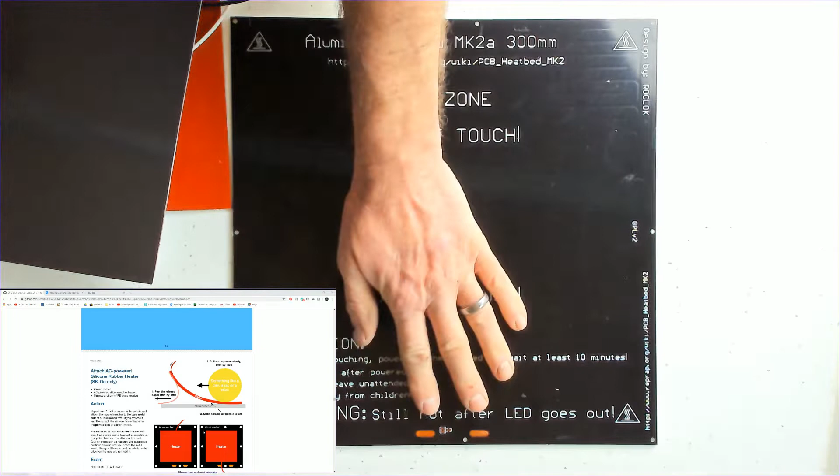Okay, so the first thing that we need to do is have a look at your hot plate. Now as you see in the description, you can have this set up two separate ways. I'm going with the way that the heat bed would sit normally. So as you can see there, that's the terminals where you would wire it in if you were using this in its original state, but then with my heat pad I'm going to put mine on the same way, like that. So it's just as it would be if it was using the original terminals.

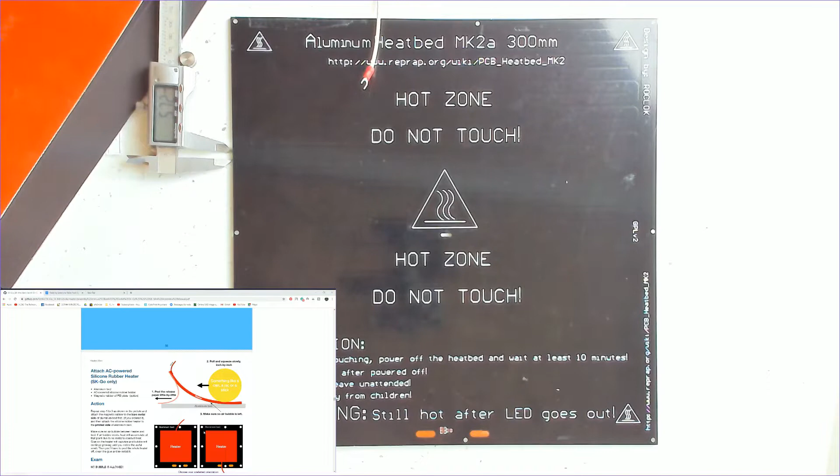Now in my case I also have the adhesive magnetic build plate with the sticker, so I need to turn mine over. Let's see if we can get the camera to focus. And then I have my magnetic backing for my build surface to put on, like so, and then when we come to start printing, my textured magnetic plate will sit on like that.

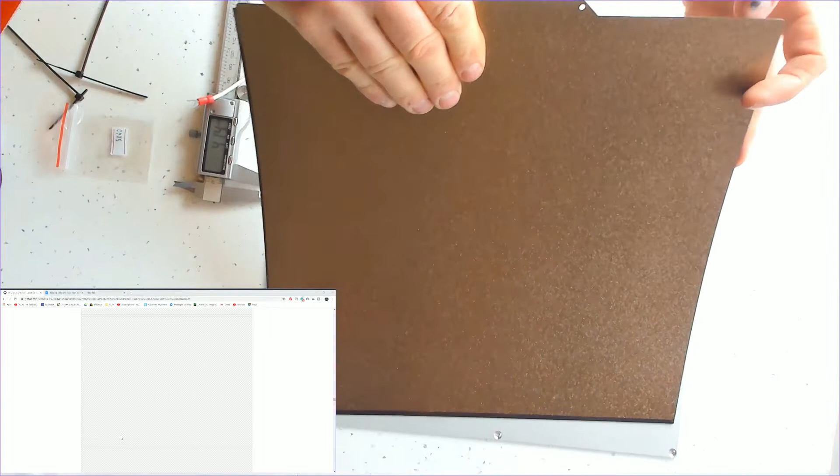Now what I'm going to do is I'm going to fit this first, as it does suggest in the description. So I'm going to line it up roughly to where I think it is sort of fairly square. I mean, if you want to go down the route of using your micrometer and getting it absolutely spot on, by all means do so, knock yourself out, but I'm not that bothered. But what I'm going to do, I'm going to use a Sharpie, or you can use any other felt tip pen or a pencil, and I am going to mark a little line down this side.

Now the reason for that is, I know it's put a nasty mark on my metal surface, but I'm really not that bothered. The reason for that is when you come to stick it down, you're going to peel the surface off the back like that, and then you're going to line it up with that line like so, and then peel the backing off and lay it down. So that just gives me an edge to work to, like that, while I start doing the peeling off. So let me get the corner of that peeled and we'll get that fitted on.

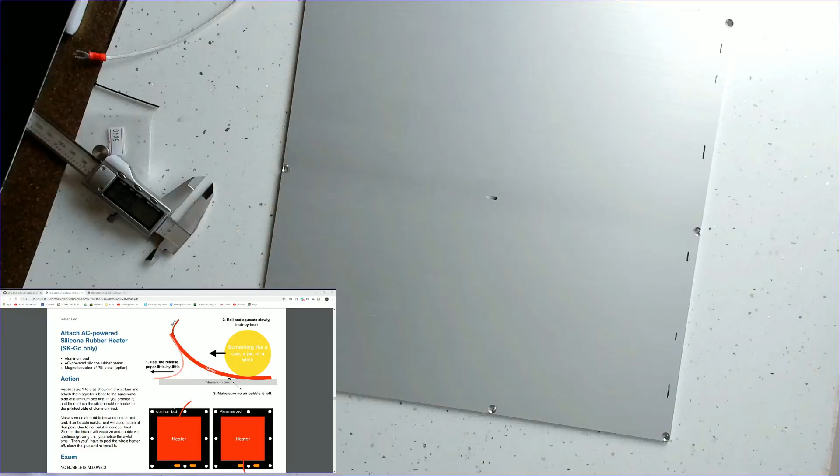Now at this stage you want to make sure that your aluminium plate is clean. A little bit of 99.9% IPA or 100% IPA on a little cloth, give it a wipe over, make sure you get any grease off it that may have been on your fingers from when you were oiling your lead screws or your linear rails. So yeah, just make sure that this build surface is free of oil or dust or grease or nasty stuff, no lumps in it, no bits of grit on it, anything like that, before you go any further.

And then you just need to take your backing, you need to just bring it over a little bit like that. We're going to set it onto my line like so, and then I'm going to do that, and this is where the roller comes in useful. You don't actually need to roll it, you just do that with it over the surface of the bed as you bring it forward.

That way you're making sure you're getting no air bubbles in. As you slowly pull the backing paper away and you're sticking it down, that makes sure you get a good solid fit of the magnetic plate as you bring it forward. No air bubbles, very important, no air bubbles.

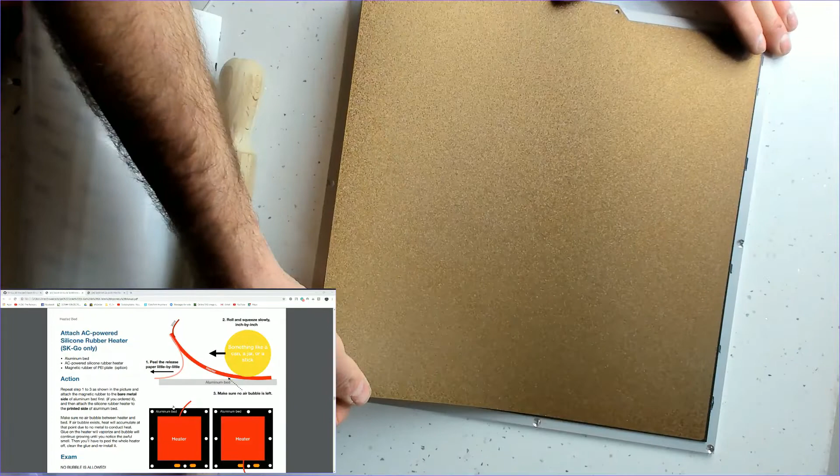But that is your magnetic plate fitted beautifully to the top of your build surface, and then when you come to do your printing, that sits on like that, but square-ish, like so. So that's fantastic. And now what we'll do is we'll flip it over and we'll do exactly the same with the heat pad, exactly the same system, just to make sure we get it on nice and neat and sorted.

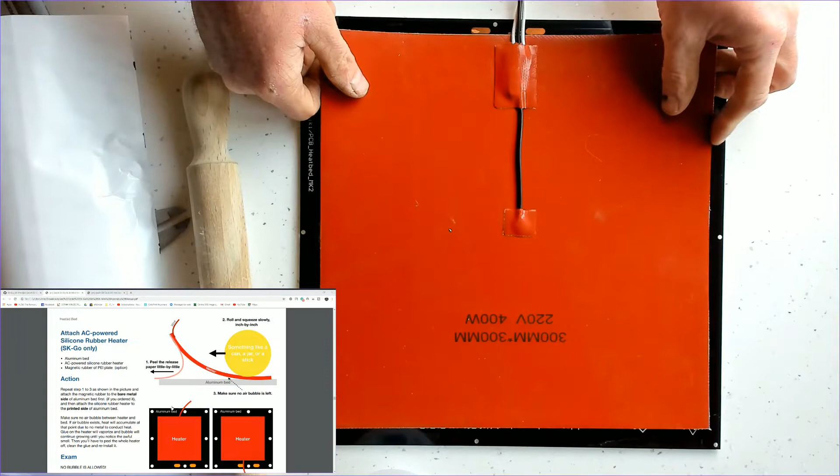So now with your build plate flipped over, we're going to take the heat pad. We're going to do the same thing exactly with the heat pad. The only difference here is, of course, using a black marker pen on a black surface isn't going to be much use to you. But what I have noticed is, if I can get the camera to focus, if you look at the top 2 points of this triangle and the bottom 2 lines of this triangle,

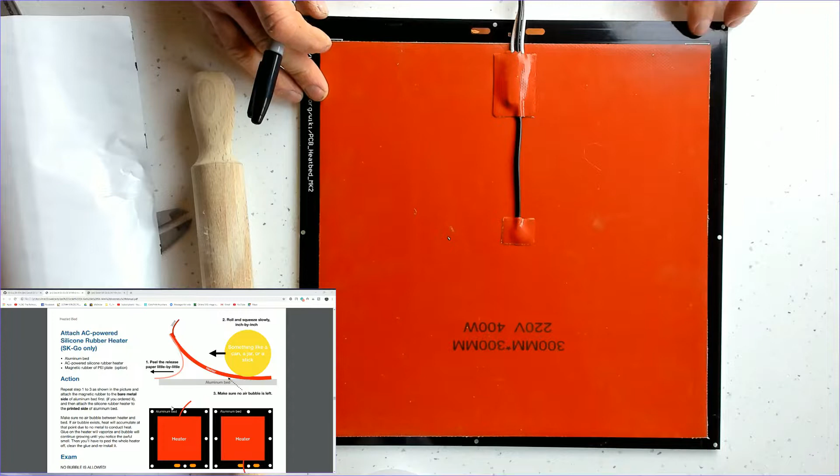when you get the heat mat something like in place, you will see, or maybe you won't because I don't know whether you can notice, but if I just lift that up, you'll see those 2 lines there at the bottom of the triangle. If you pull those flush like that and then look at this end, you've got your 2 top points. So that's your top line and that's your bottom line, so you can set it up fairly well from there.

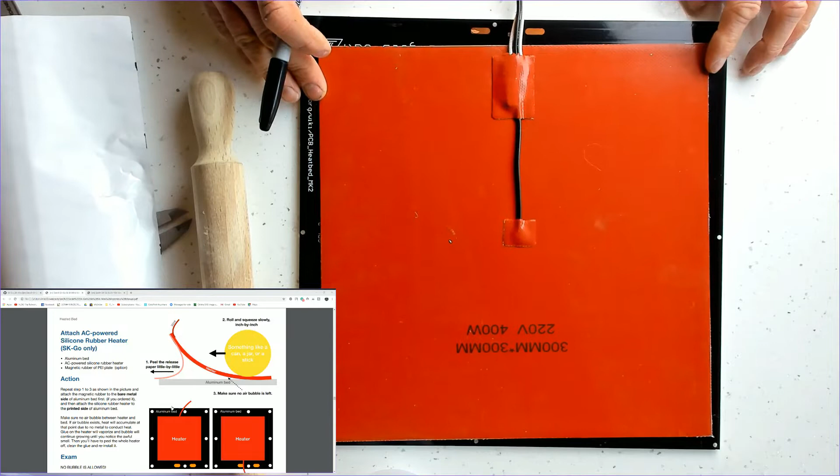You'll also notice that the bottom corners of the triangle there line up with the bottom corner of the heat mat. So if you set it up like that, you can see it is slightly high to one end. It just depends how determined you are to get it absolutely dead center. I'm just using that as a guide in this case, and then it's the same process again. We roll the mat out, making sure we keep any bubbles out.

Please notice you have cables running into here and into here. One of these is your thermistor, which is this black one here. Please make sure you don't crush your thermistor by putting too much pressure on it. Work round it when you get to it. Maybe use your fingers or lightly with the roller just to make sure the mat's down, but don't go braying at it with anything. If you crush your thermistor, you've got problems. So let's get that on.

So carefully line it up. Get your top edge stuck. Make sure you're happy with it, your positioning before you go any further, because once you're done, you're done. At this stage, if you want to just lay it flat like that and make sure you're level all the way around, I'm actually

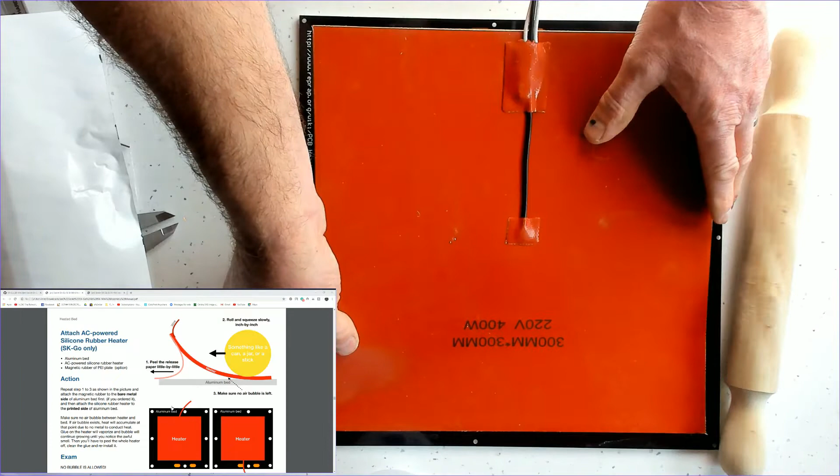slightly off to one side there, so I'm just going to attempt to lift this corner slightly. As you can see, once it starts to stick, you're going to struggle to get it right. So there we go again, making sure I'm as near as darn it square and level. I'm fairly pleased with that. So let's get that top edge on, then lift underneath, get hold of the backing, pull the backing towards you.

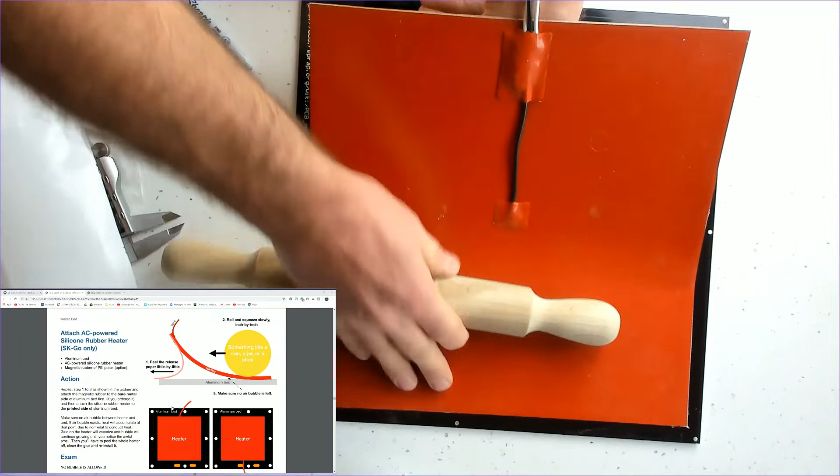At the same time, I'm actually rolling this time, channeling my mother, making pastry. Again, to make sure no air bubbles, no dirt underneath. Be careful around your thermistor. Pull the sheet out a bit more. Put the rolling pin back. Pull the backing sheet a little more.

Again, no need to rush. If you rush, that's where you make mistakes. That's where you'll get your air bubbles and you'll have trouble. You can see how tight I'm getting it to the backing paper by the force I'm having to use to pull the backing paper off. That's making sure that everything is absolutely right.

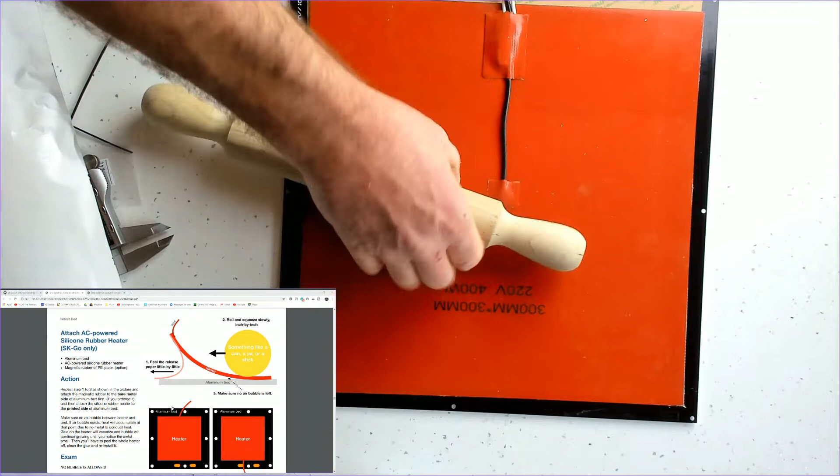As you can see, I'm rolling either side of this wire rather than rolling over the top of it. That in theory will bring it down. You can see I'm about here now with the pull. Pull it a little bit more. Get that roller working. Make sure you keep all the air bubbles out as nice and as smooth as you can.

Coming up to the connections now for the heater. Again, don't apply too much pressure over the top of that. You'd hate to do that any damage after getting this far. Pull forward a bit more. Roller again. And then final bit. Probably better to do smaller sections as you get towards the end so you don't get a large bit suddenly going blop and coming off.

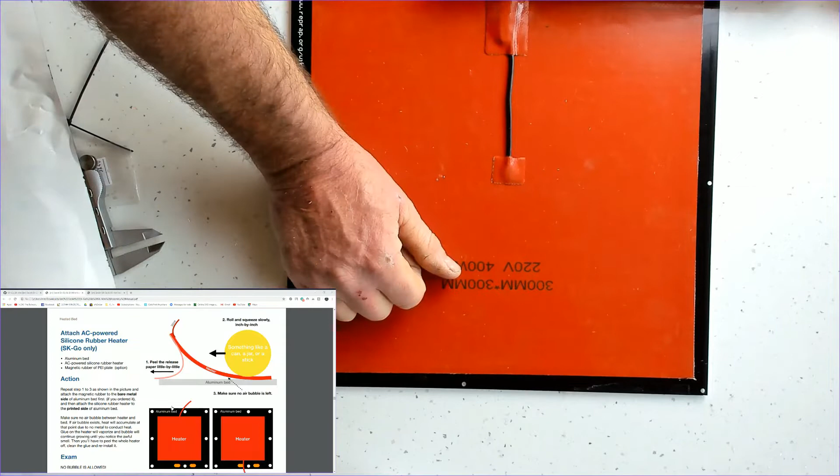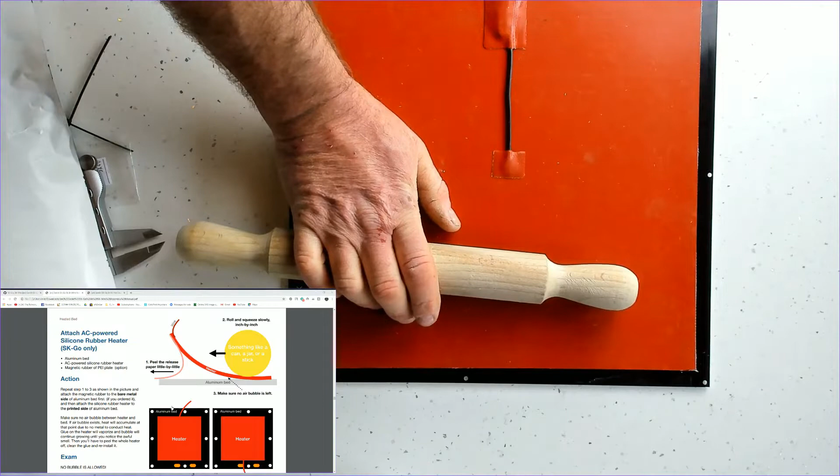So we'll go right to there like that. Roller that. Like so. Final bit. And off it comes. Roll that flat. Roll that flat. Make sure that's all down like so. Check all your edges. Like that. And there you go.

One heat pad. Well put on. No air bubbles, no lifting, no nothing. Magnetic plate on the other side. No lifting, no air bubbles, no nothing. Done. Let's get on to the next stage. So now we move on to the next stage.

Because you built this some time ago, it's always worth checking now that you haven't knocked any of these out of alignment and you haven't got any twist on the frame. Because you've only got these brackets in the corners, it is possible that they can twist slightly while you've set it to one side. So just go around and double check it is still flat and level. If it's not, just loosen off the necessary bolts, push it flat and tighten them back up again.

So the next thing we need to notice is the fact that we have these offset holes here and here, and then these ones here. So in my case, you've got the two front ones, which are going to be the two front bed leveling screws, and then you've got this one here, which is my rear bed leveling screw. And like I say, it is just slightly offset to this side, so just need to make sure that that's how you've got it.

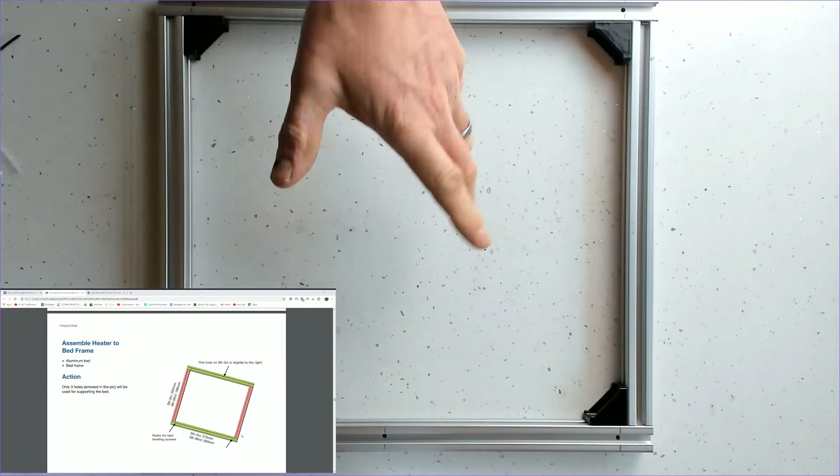If you wanted the orientation the same as it is on the diagram, it would be the other way around, but I'm using my overhead camera for this, so it's inverted it. So yeah, just make sure that you're picking the screw that's offset to the right hand side as your back one, and then you've two front ones there.

I have noticed on the forums that some people have changed it and they've put 4 on and drilled it for that, or 6 or 8. Now we may do that in the future, but at this stage we're sticking to what the manual says and we're going with the standard build. All the upgrades and updates will be done in future videos

if I don't die of coronavirus in the meantime.

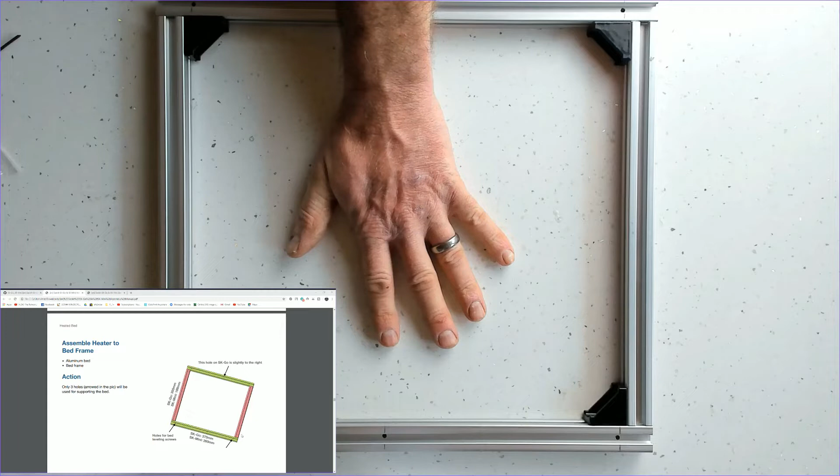So this is the little parts bag containing everything you need for the bed levelling. You've got the M3x45 countersunk bolts in there, the M3 nuts, I don't know whether the washers are in there. The washers aren't in there. The washers will be in the pack. We'll dig those out in a moment. The butterfly nuts and the springs are in there though, so we'll just dig out the necessary washers and we'll get this built together.

So very simply, as you can see in the photograph here and the diagram here, we're going to put the bolts through the aluminium bed, tighten the M3 nut up against it, and then you have the M4 washer, then the spring on, then that sits through the aluminium extrusion there, and then you put your other M4 washer underneath, and then your butterfly nut or wing nut goes onto there. So we'll do the front two corners first.

So we've got bolt in like that, nut on the bottom. Very fiddly when you've got fat hands like me to get that nut on square, but once it's on square you just spin that up. Now you can make this as tight as you like, because this is a permanent fixing like this.

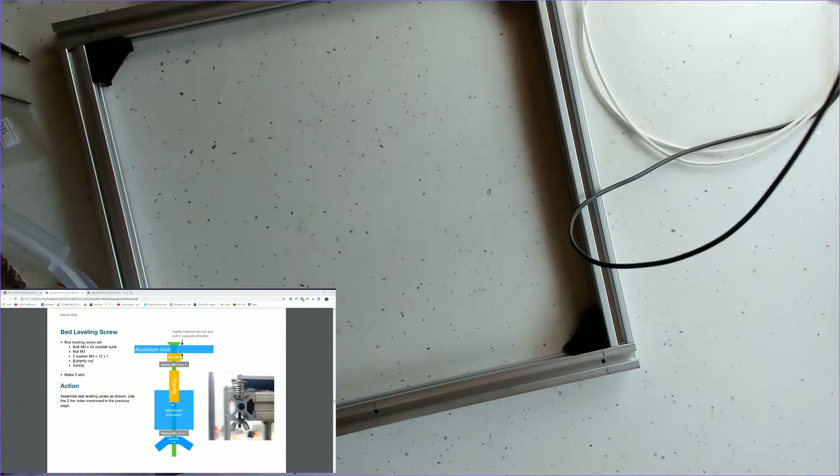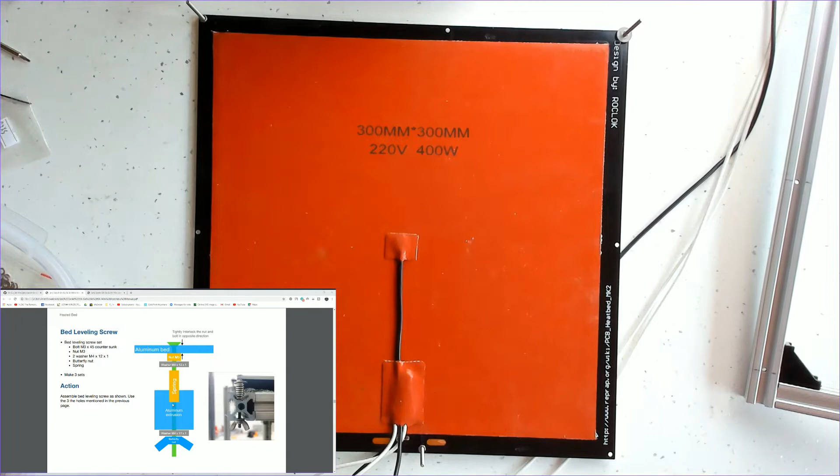Top tip for fitting the next section: lay that down that way, we'll put the washers on, we'll put the springs on, and then we'll actually lower this onto there and put the washer and the springs on from this side, because it's a whole load easier. So your washers in each corner, 1, 2, 3, then your springs on, 1, 2, 3.

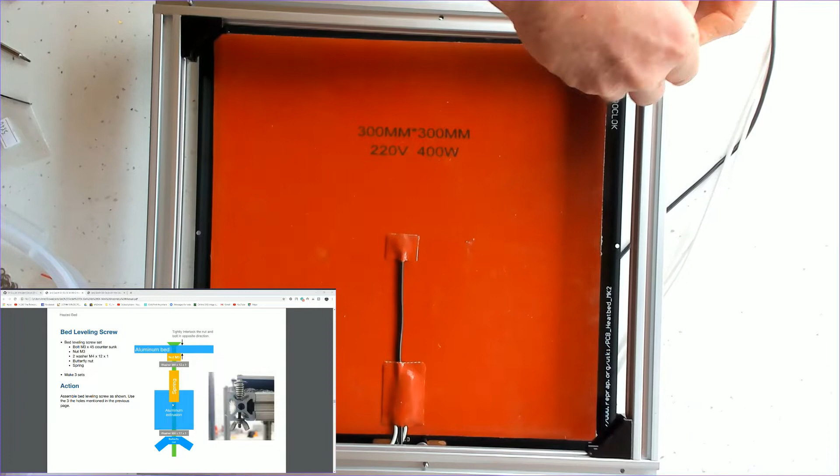Get your surface, make sure everything is the right way around. Those bolts should just drop through, a little bit of wiggling to get them lined up like that, so you've got all those three on, and then your other three M4 washers, and you just need to put it under a little bit of tension to get your wing nut on like that, and then the same on this one.

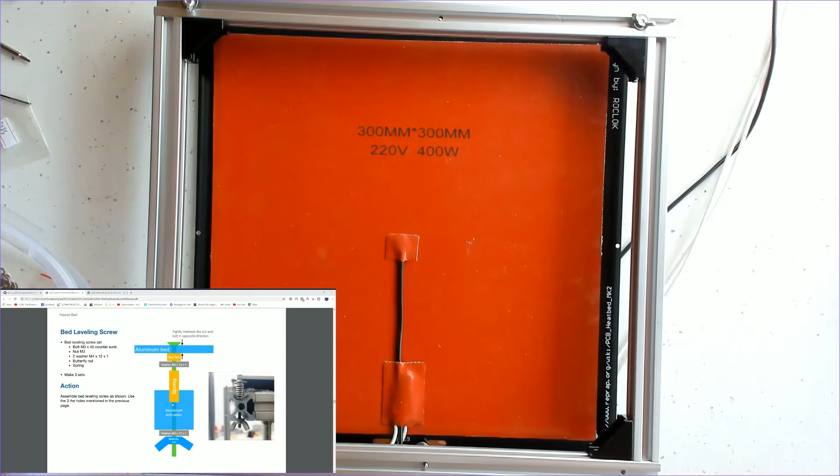Like that, and then the same finally on the single one, which will be your back one, with the orientation that I'm using and the setup that I'm using. That goes on like that.

Now if you tighten them all down just so they're flush with the top of the wing nuts, you then know that you've got equal tension on all three leveling points, therefore you're not twisting anything, you're not twisting the build plate or your frame, it's all under equal tension because you've got your wing nuts all tightened the same amount, and we'll put that to one side and we'll carry on.

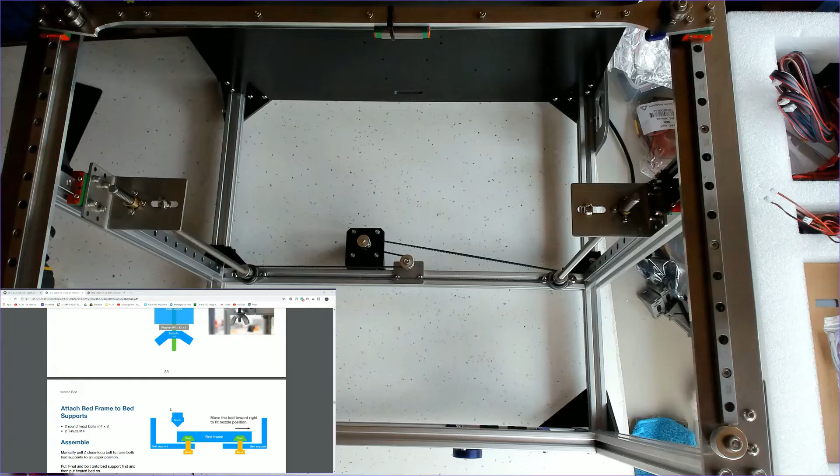So we simply put your M4x8 bolts through the plates with your T-nuts on, making sure your T-nuts are running the right direction to accept the extrusions from your build surface. Feed your cables through and out of the way, like so. And you just need to sit those onto your T-nuts. Slide your build plate back.

We will set this up squarely later on, but you need to make sure that the front of your build plate here does not come beyond the front of your frame here. You also will need, at some point, to slide the whole frame this direction so that your start point for your nozzle is in the right place, but that can all be adjusted later. For now, all we're going to do is get it so the T-nuts grip the build plate and it doesn't fall off. So now you've got it like that.

Trusty wobble stick underneath again. Tighten those up. And that's your bed frame in place for now.

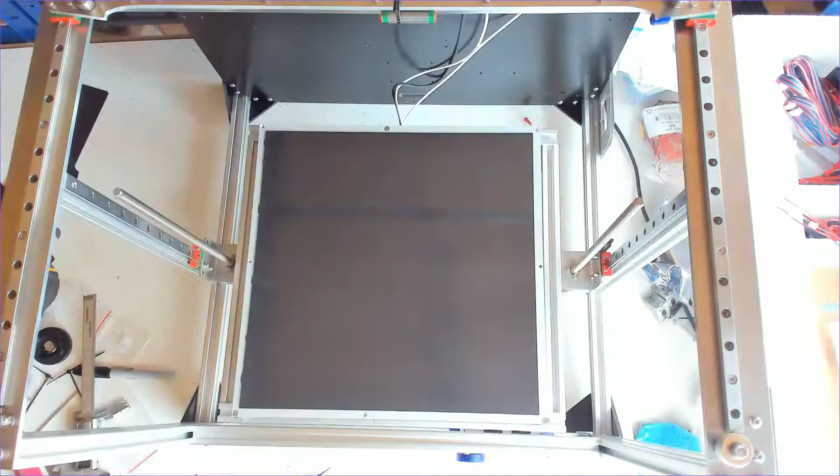Just a little addendum at this point. If you want to make sure at this stage that you have got your build surface perpendicular to your frame, if you lower your lead screws down until you've got your frame there level with your frame here, and you've got your gap all the way along, you can then measure that with your calipers or a tape measure, or you could even use your plastic guide.

If you actually do that, you can check and see that you've got the same distance all the way across the front. That then tells you that your bed is square to the front of your frame, which means that everything should be good for later on.

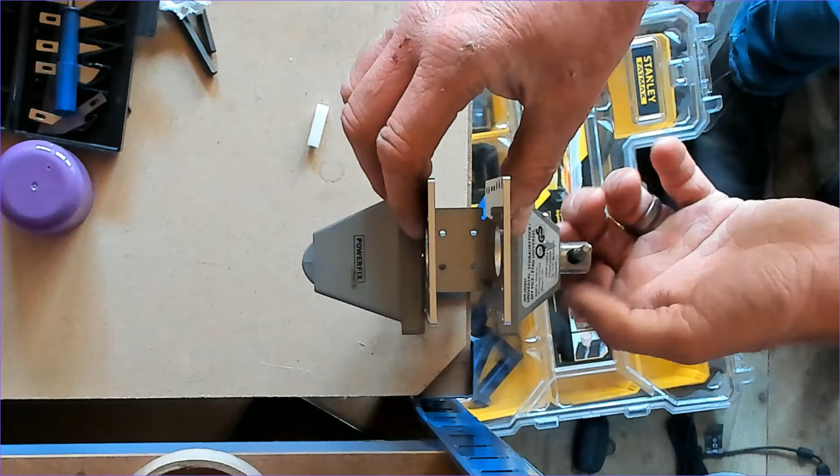And basically all I've done is I've put the centre section and the two side sections into the vise and just carefully nipped it up just so it started gripping, making sure I still have enough flex in it to open it up like that to feed the stepper motor in. We'll go and put this back on the frame, put the bolts back in, drop the stepper motor in, and then slowly tighten up the four corners with the bolts and the inserts, and hopefully that will nip it up without causing too many issues.

Another little addendum: if you find that you can't get your nut on the back of your M3 bolt, if you have some longer M3 bolts, which I just happen to have lying about, put those on, use those to pull your edges in. I could just about get the nut on, but I was a little bit concerned about stripping it. So like I say, I've put these longer M3 bolts in I had in my spares department, which means I can nip those up now to such a point that the original bolts will fit through, and I'll have plenty of thread on the back to get the nut on.

So now we move on to the belts. As you can see, we are provided with a 6mm GT2 belt. This is approximately 2 meters in length. Now what I suggest you do is you test fit your belt around all the pulleys. Don't get it too tight, but do it all when you've got the belt in one piece. Mark the belt where it will feed through the plate here, and you would snip it, and then check that you have enough left on the rest of the belt to do this section here.

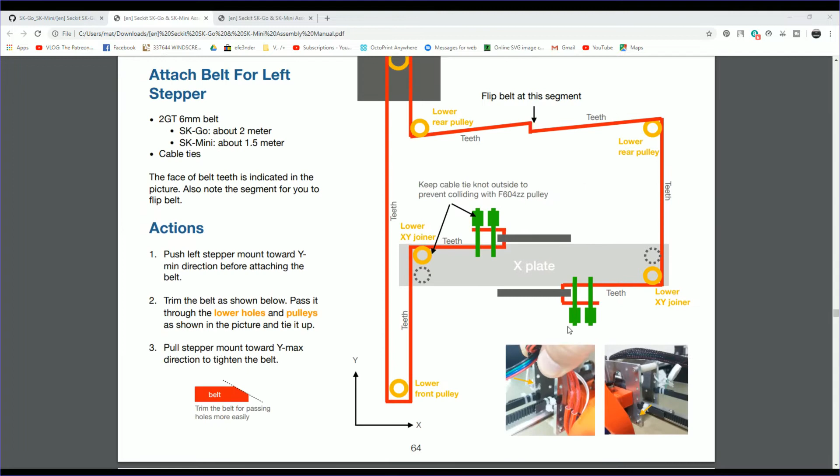Because what you don't want to do is to do this, cut it, and then find you haven't got enough left to do that, or cut it in half and find that you've got enough to do that one but not enough to do this one. So that's the first thing I suggest you do. I've done that, I've checked it, and I've made sure that I can cut the belt right down the middle, and it'll give me two belts of a perfect length to run around the system.

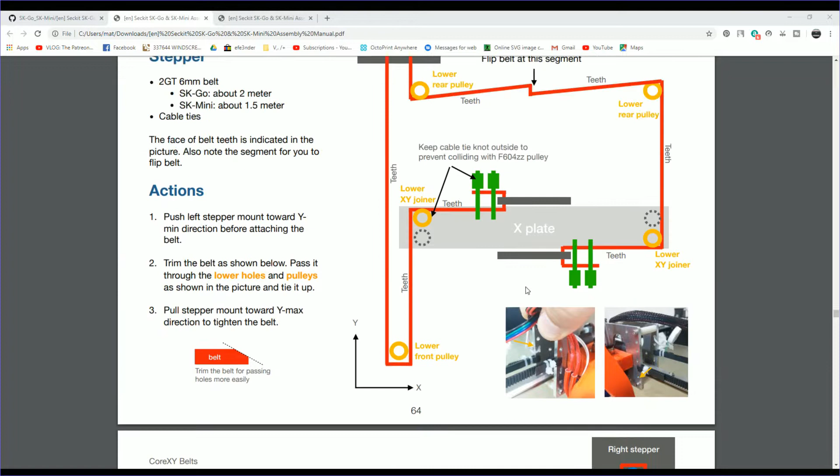Also note, they suggest trimming the belt at a slight angle at the top, just so it feeds through the slotted parts of the plate easier. I find that if you push it through and then get a pair of pliers on the back and just give it a little pull, it pulls it through a lot easier than trying to do it with your finger ends. So let's get back to the machine and I'll actually show the fitting of those belts.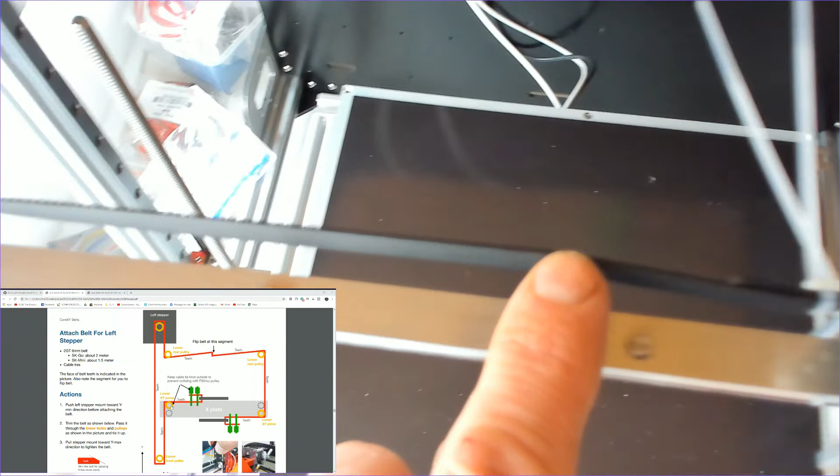So if we follow the path of this lower belt, you see it starts here, tooth to tooth, 2 cable ties on. I'll snip those off in a minute and maybe shorten that a little. We come along the belt here, it goes around the back side of that pulley, comes around the front, goes along the front of that toothed pulley, runs down around the tooth pulley on the stepper motor, making sure the stepper motor is loose, so the stepper motor is all the way forward, so when you come to tension it you can push back on the stepper motor, thus tensioning the belt. So it comes round, comes across here.

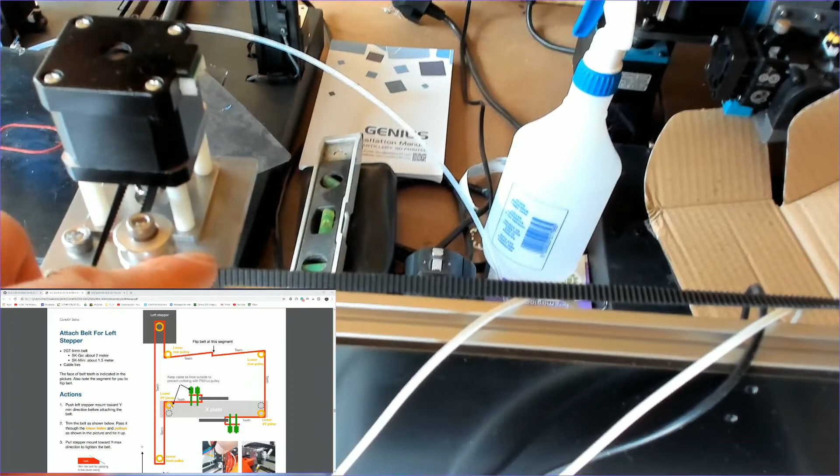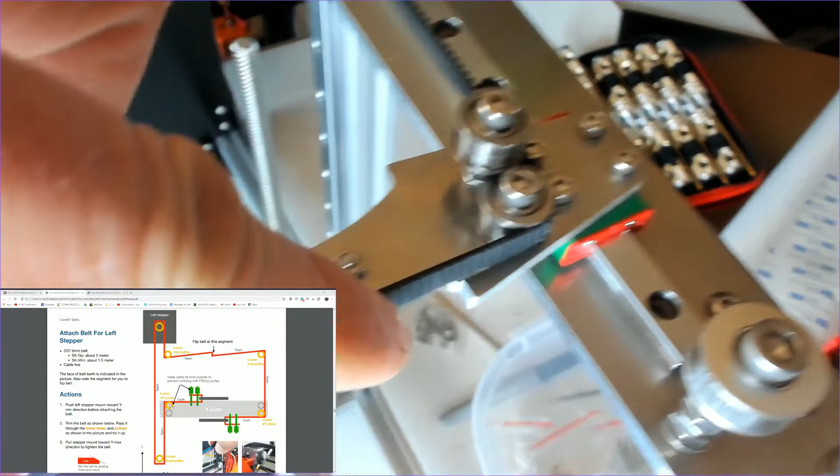Now across here we have a twist in the belt. As you can see, the teeth are facing here and then they turn over in the middle, so there's your twist, and then it goes around the bottom pulley there, so the teeth are now on the outside of the belt. As it comes down here, round to this pulley, and then we go along and through the lower slot in the front there, we've got tooth to tooth again, so we'll put 2 cable ties onto there and then snip the end of that one off, and that's the lower belt on.

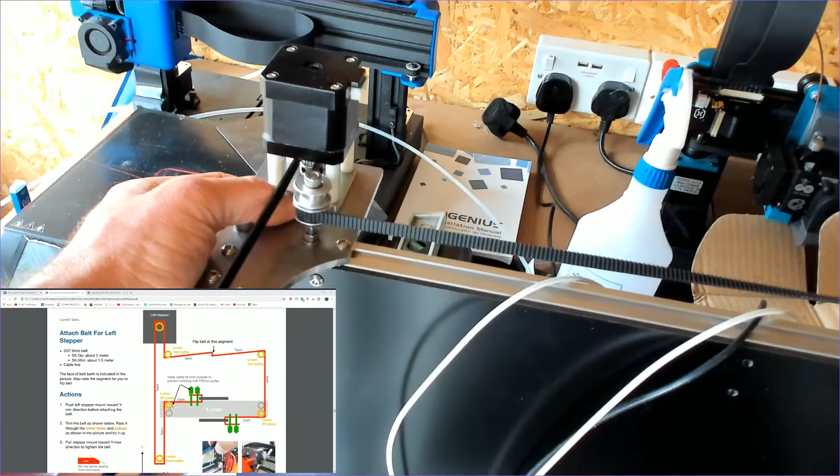I've got a fair amount of tension on it at the moment, but like I say, we will be tightening that by pushing the stepper motor back, which will then put the whole lot under tension, but we'll cover that in a moment. Let's get this snipped up and shortened, and then we'll go do the higher one. We'll come back, look at that, and then we'll move on.

So now we'll check the path of the upper belt against the diagram. So teeth facing, clips on, go around this top pulley, down along here, around that pulley, a twist in here, so the teeth go from the outside to the inside here, then they go around that pulley, round that stepper motor, come down here with the teeth on the inside still,

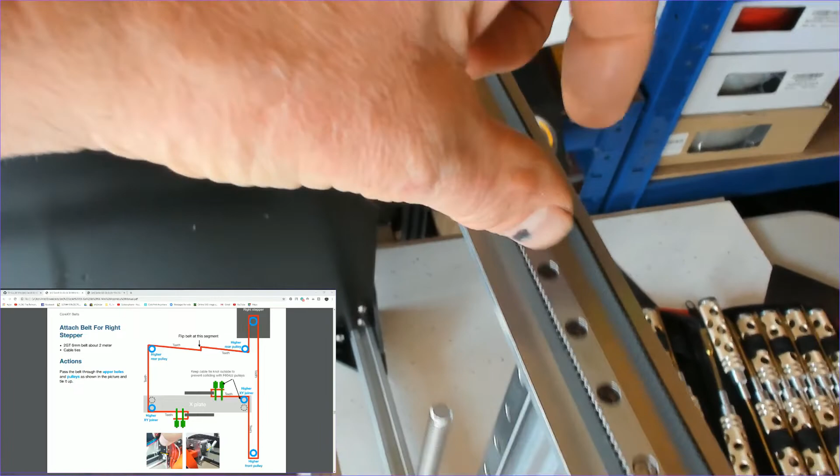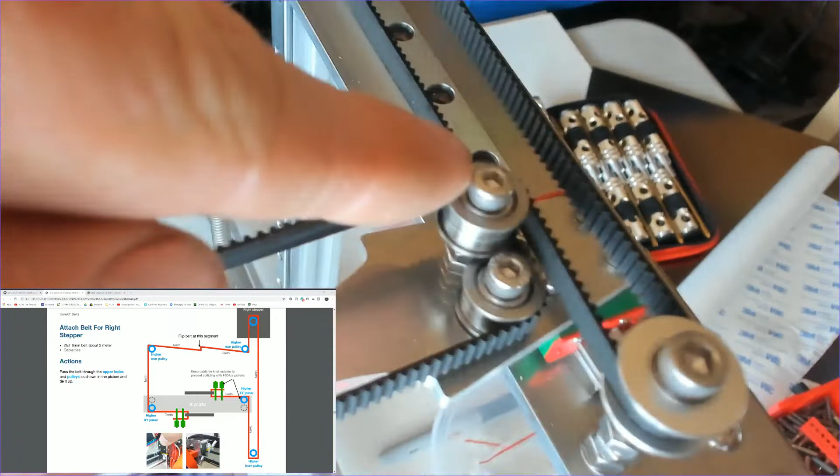along here, around this pulley at the end. That's a toothed pulley, so make sure your teeth are on the inside to go around that. Then round this pulley here, back, terminates on the top slot at this side here, two cable ties on, and then we'll just nip that back there, and that's that section done.

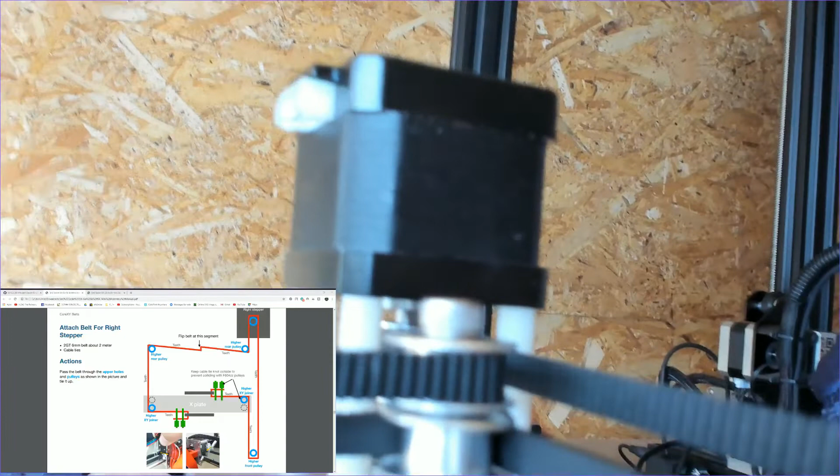What we need to do when we've done that, we'll come back and we'll check the height of the two pulleys on these rear stepper motors to make sure that they're sitting right and that we have no binding issues with the height of those pulleys in relation to everything else. So pulling this right hand pulley, which is this one here, backwards and forwards, you can see that it's riding a little bit high. You can see the belt going up and down, which means it's a little bit high on the stepper motor behind here. Get you a shot.

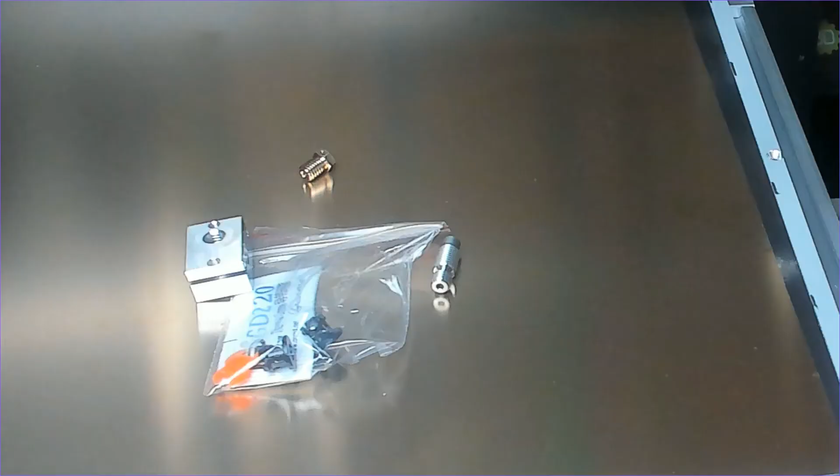So I need to get the Allen key, drop that cog a little, which will drop that belt on that pulley a little, which will make it run smoother. In the instruction manual, it basically says go and find a different resource on how to build your direct drive hot end. Well, let's help you out with that. Let's get this one put together before we fit it to the machine. So let's start by building this E3D V6 style hot end. Simple enough to do. It must be, because I can do it.

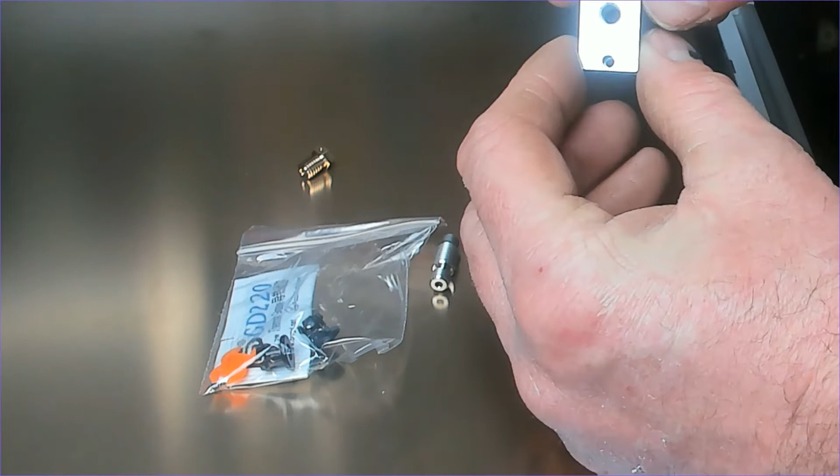First, get the orientation of your heater block the correct way around. So you want it so you've got the screw thread that the nozzle goes in, tapped hole above, tapped hole below, but you've got the one nearest like so. Get your nozzle, turn it just a little way in to start with, like that, not all the way. Then what we want to do is screw it all the way in, like that, and then unscrew it about a quarter turn.

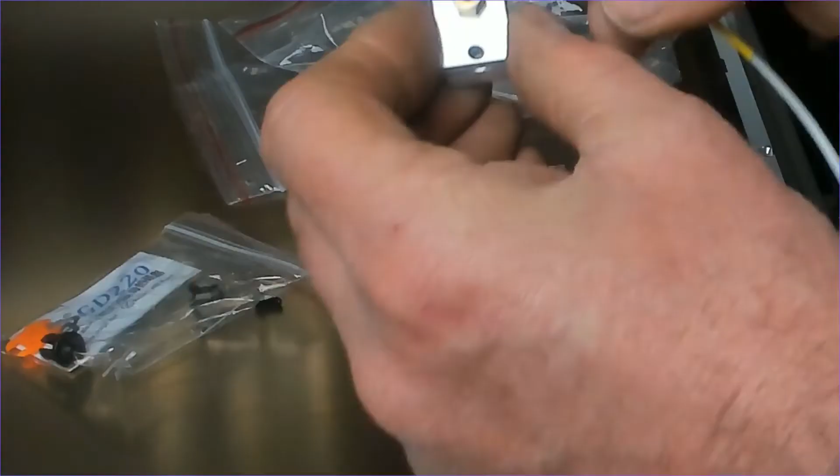Then get your heat break, screw that in until it bites on the nozzle, like that. We've got that piece like that. Insert the thermistor so it's just flush with that edge. Turn the grub screw until it just touches the thermistor, like so. And then turn it 1/8 of a turn. So you want to do it about that much, no more. You do not want to crush the thermistor, as that will cause you more trouble than it's worth.

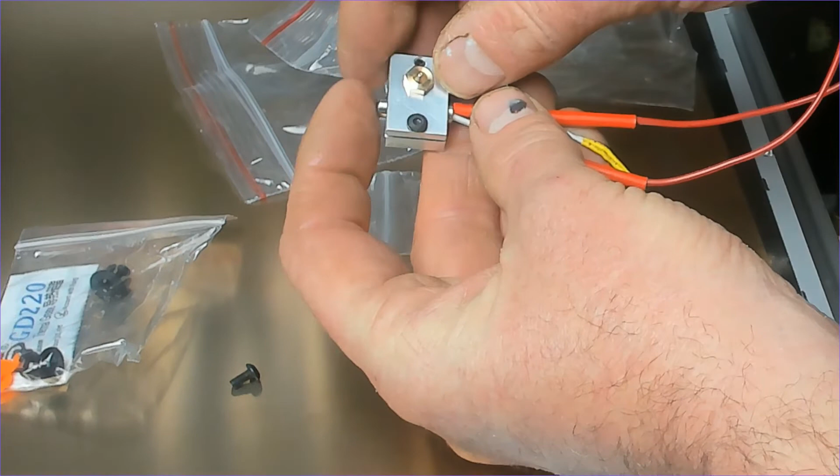Take the bolt for your heat cartridge, pop that in, screw it up. Just do that by hand. Insert your heat cartridge. And you just want that set sort of equidistant either side, and then give that a little nip up. Again, do not over tighten it. You do not want to crush it, as that will cause you problems later on.

You just want to tighten it until it slightly deforms that metal there, so as you can see it's just pushed in slightly, so the gap's narrower at this end than it is at that. No more than that, just slight deformation, so it just bends over slightly, and that's more than sufficient to hold your heater cartridge in place.

Then grab your thermal grease and you just want to apply a little to the thread of the heat break. You don't need to use it all, just apply a little around the thread. Like so. You don't need to put it anywhere else but on the thread like that. And then you can screw that in. Like so. It doesn't need to be any more than finger tight. Just wind it in. There we are at finger tightness.

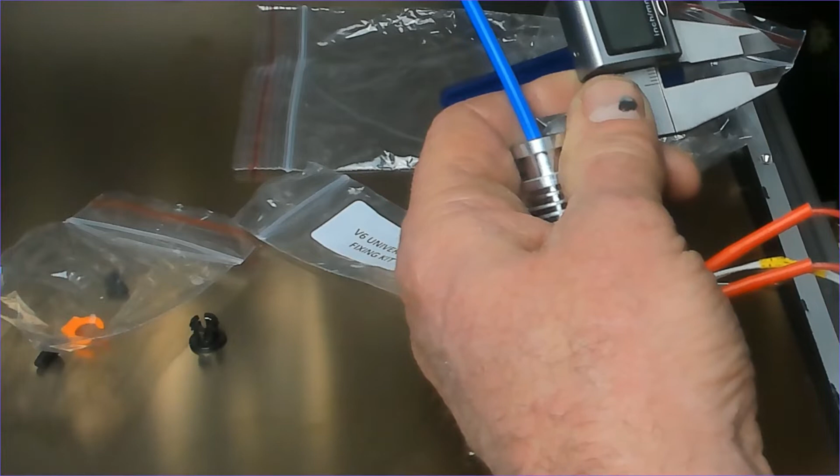So now you want to cut your PTFE tube. So once it's sat all the way into the throat, it's 5mm above the top. So I've set my digital calipers to 5mm. Like so. I've not got enough hands. Bend down and pick up my Sharpie. And with my Sharpie I will mark on the PTFE tube 5mm. Get out my tube cutters, place it in.

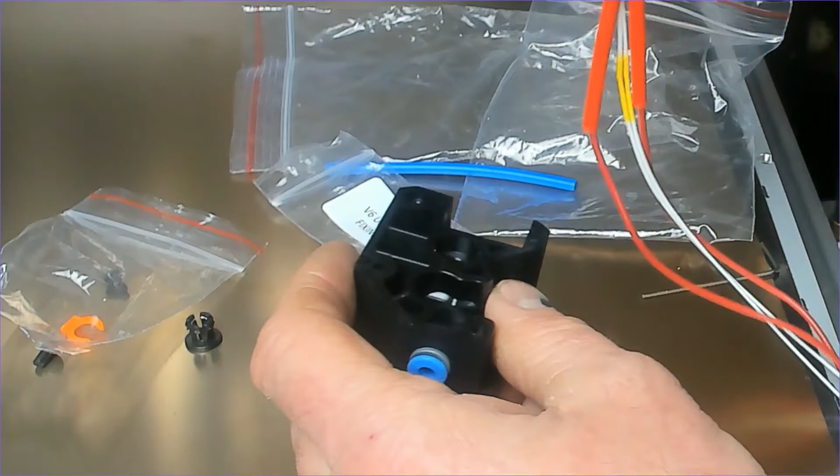That should now be the ideal length to fit in. So once you've cut it, put it back in, carefully feed it in into place like that. There we go.

So the first thing to do is to offer up the back part of the Bondtech style extruder, like so. Get your gear. You want the grub screw outermost. So put it on in that orientation like that. Holding the back plate in place, you can then make sure that you have the cog set in the right position, that it lines up with the teeth, and then you can just tighten up like so, happy in the knowledge that that is set in the correct position.

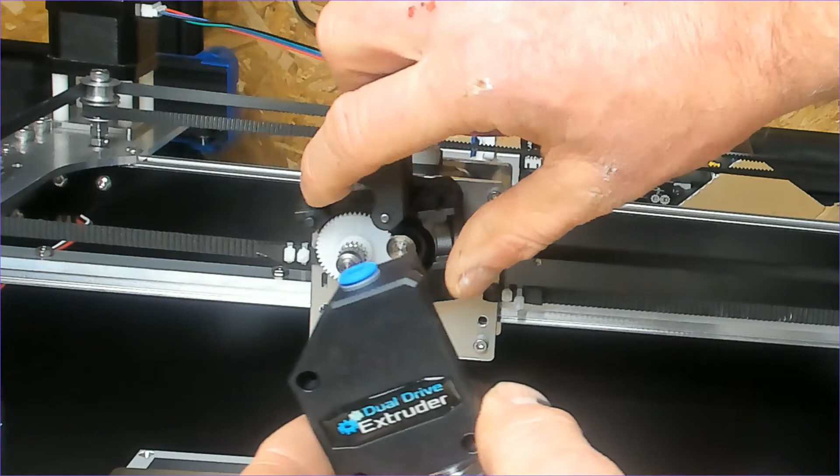And we simply offer it up to the back, make sure it all lines up. It should just push together. Like so. Insert the screws there, there and there right the way through so they go through the plate and into the pancake extruder motor. We'll get those three in and then we'll come back.

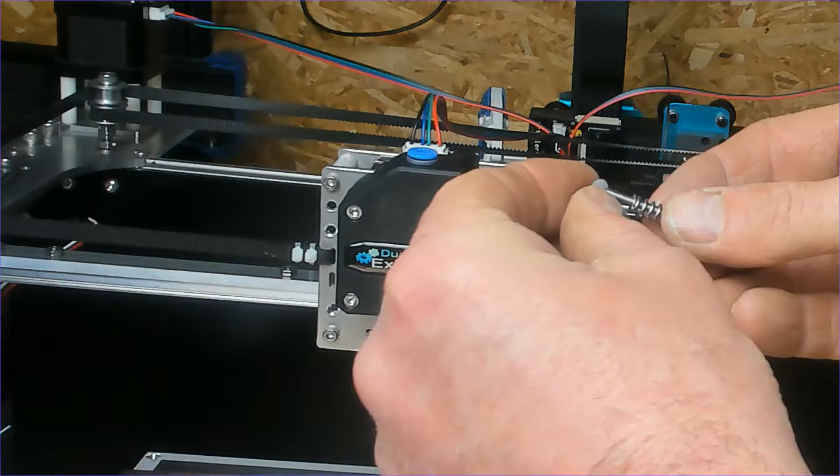Take the fan shroud with this curved edge to the bottom. Take your fan with the label side inward, cable to the top, and then screw the 4 screws through from this side into there. So I'll quickly do that and then we'll come back again.

At this point I've actually decided to turn my fan through 90 degrees so the cable actually comes out of the side, because then it'll be easier to pick all the cables up together for cable management. But now this just simply clips over like so, and like I say, your cable management will bring everything up like that. You can re-put your fan back on the front like that, and then you can tie in this cable with those, put the extension on it, round to the back, and then we'll do the wiring.

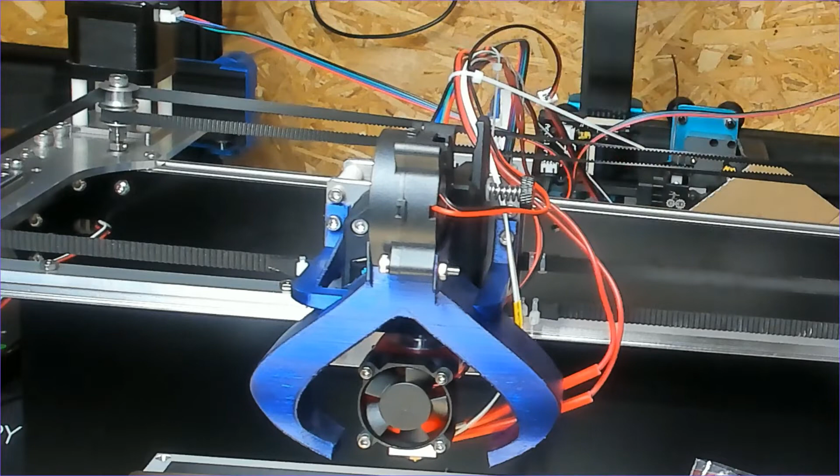At this stage it's a good idea to grab your extension for your part cooling fan, clip that on, and then you can hang that over the back with all the other cables, which will eventually go into the cable management system, and we'll probably put a little bit of filament down to give it some support as it goes over the back, but we'll cover that later on. Time for a bit of a tidy up round the back, get these things plugged in.

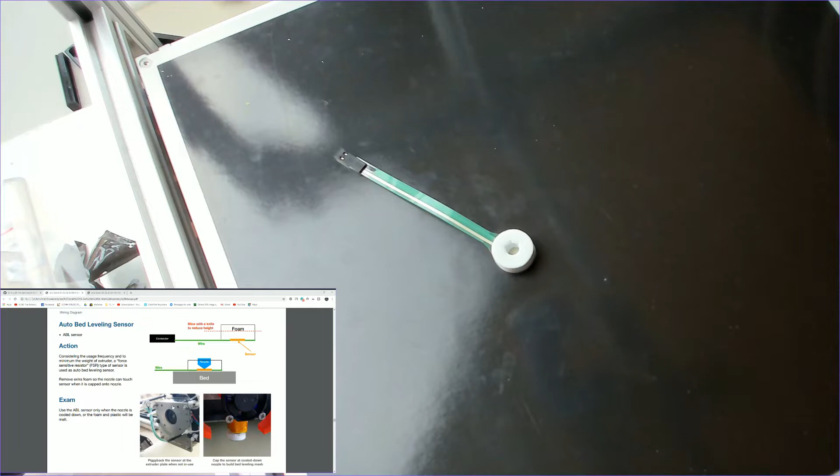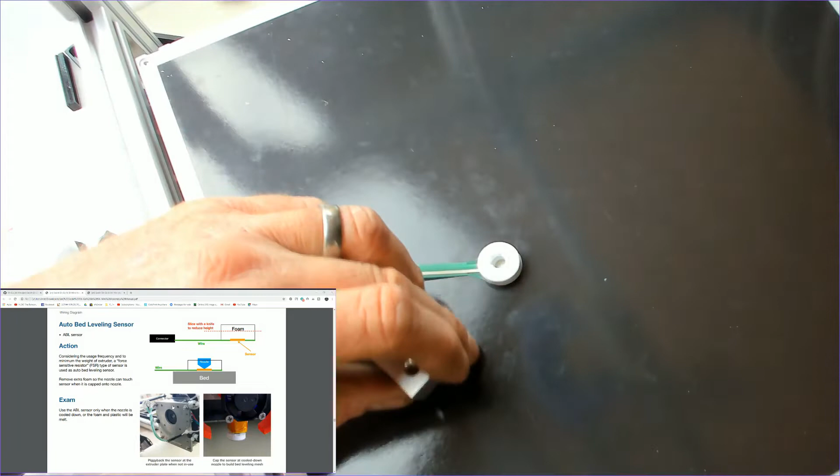So at this stage we need to prepare the bed levelling sensor, and what you're asked to do is to cut a small section off the top of the foam here, so the nozzle when it's seated touches into the bottom of the metal plate there. Now personally I will not be using this bed levelling sensor, but as I am building the kit as it comes with the instructions, I will be putting it on for now and showing you how it works. Basically there's 2 slips of metal in there, and the nozzle pushes one piece of metal against the other piece of metal, which makes a connection which gives you the bed level.

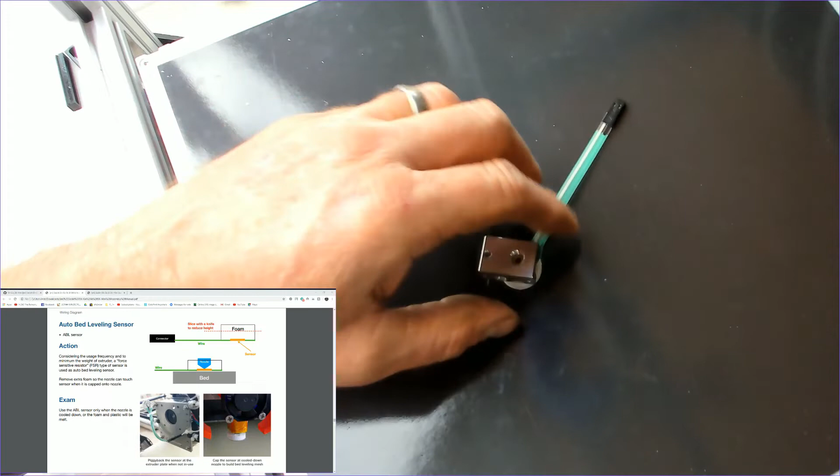But as you can see, I've just pulled the nozzle and the block out of the pack. The problem is that the foam is too thick, so the nozzle will never touch the metal plate on the bottom. So you just need to trim a little bit off, just so when it is inserted like that you can just feel it clicking at the bottom. So we'll do that and then we'll come back. So I've chipped off there with my X-Acto knife about 1.5 millimeters of the foam, and now that sits perfectly well into the block like that. So that's now set to where we need to be.

So the next job, as you can see, we need to alter the wiring on this plug slightly. So basically all we're doing is we're taking the wire out of this top point here and moving it into this middle point here. There's a tiny little tab here which you push down, pull the cable out, then lift the tab up slightly so when you push it back into the middle it locks in place. Now I'll try to do this on camera. Unfortunately the screwdriver is going to get in the way, everything's pretty much going to get in the way, but I'll do my best to show you the process.

So you just have to push the tab down, pull the wire out like that. There's a tiny weeny little tab on there, you probably can't see it. Just get your fingernail underneath it, lift it up slightly like so, and then you push it back into the middle one like that. Make sure it's locked in place, and it's as simple as that.

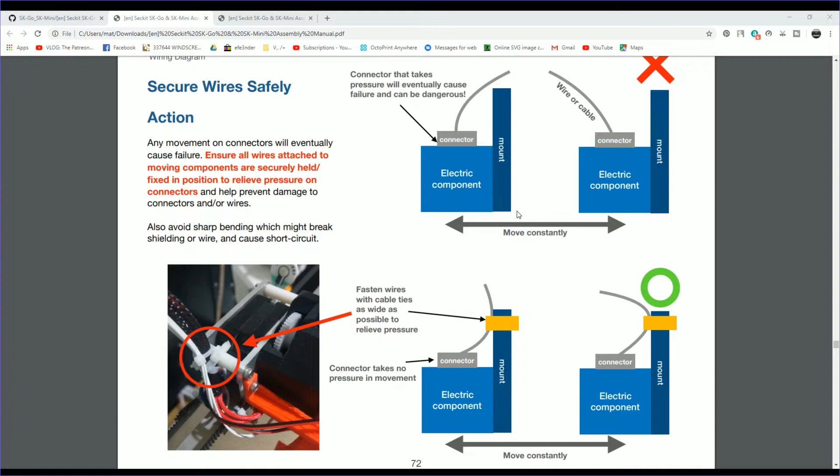Now that we're moving on to the main electrical section, I'd ask you to take a couple of minutes just to look through this, how to secure your wires safely to protect them from pulling or possibly straining connectors or such things like that. It's very important that you take notice of this to make sure that your build is done correctly and to the safest standards you possibly can.

So now we're on to the wiring. Again, there is a disclaimer in this section. Please heed this warning. It's very important that you know what you're doing before you start doing this. I will not be responsible for you blowing yourself up, and neither will the producer of this kit. If you're not happy doing this, get somebody in that is.

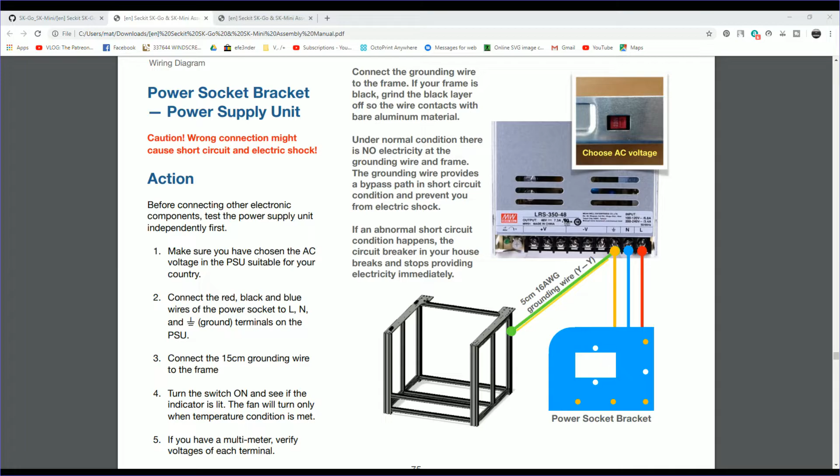So we're down to the nitty-gritty now. This is where we start putting all the wires into the main board, through the relays, everything else. Now stop, take a break, go and grab yourself a cup of coffee, cup of tea, can of Coke, nothing alcoholic. If you're feeling a little tired, your eyes are hurting, it's all just getting a bit muddled in your head, leave it, come back another day. You don't need to carry on now, come back with a fresh head. But whatever you do, don't carry on now if you're not 100%.

Having said that, I still feel fairly good, feel 100%. I can edit in and out as I see fit, so I might not be doing everything straight away. If I start to feel tired, I'll stop. I'll continue with an edit point and just come back into it. But without further ado, let's crack on, let's get into it, let's get this thing wired up.

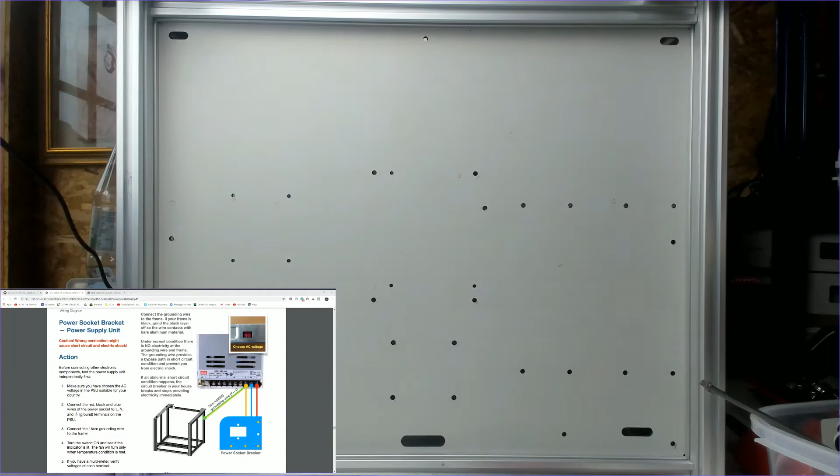So now we've moved around to the rear of the machine, we need to familiarise ourselves with the power supply. This is a company called Meanwell, probably the best power supply maker on the market. First thing to check, is it set to the correct voltage for your country? Mine is set to 230. If you're in a country where it's 110 or 115, you would flick that down so it shows the correct voltage in the window. Like I say, in the UK it's 230, 240, so we've got it set correctly there.

Looking at the front here, working from the right to the left, you have the mains voltage on the far right hand side. That's your live, your neutral and your earth of your mains voltage. That's the bit that'll kill you. Be sure you know what you're doing. Like I say, if you're in the States or somewhere else that uses 110 volt, that's your live, neutral and earth for your mains power.

The next three, 1, 2, 3, are the 24 volt negative terminals, and then the last three on the left hand side, 1, 2, 3, are the 24 volt positive terminals. The little screw adjuster at the end is for adjusting the voltage to make sure it's at 24 volts. You should not need to touch that, that is set at the factory.

So let's go through that just one more time. Live voltage on your right hand side, do not do that with the metal thing when it's plugged in. This is completely separate from the power supply. Don't ever touch these terminals with anything metal while there's any power to it. You've got your live, your neutral and your earth of your mains voltage. Then 1, 2, 3 negative 24 volt terminals, 1, 2, 3 positive 24 volt terminals.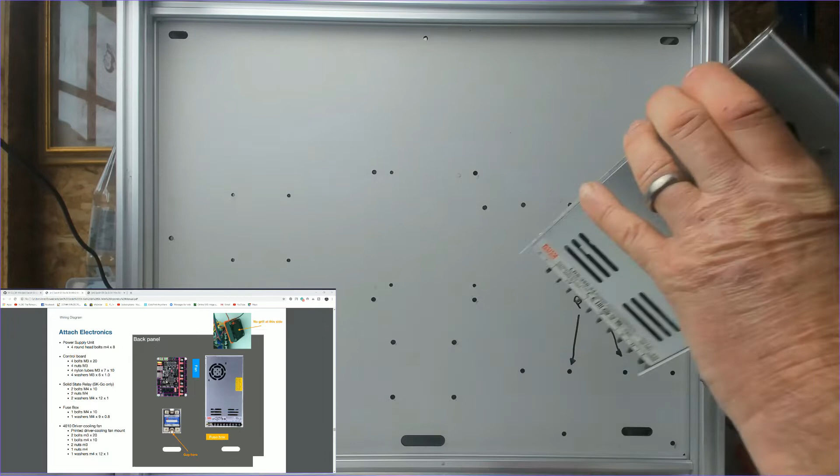So first we will fit the power supply into place using 4 M4 by 8 round head bolts. As you can see, I've marked on the back panel for you where the 4 holes are. You bring the bolts in from the back and they screw in to the threaded parts here on the back of the power supply.

Next we'll fit the mains voltage fuse, which looks like this. You're going to take the fuse holder out, we're going to remove this screw and it's going to be placed down there using an M4 by 10 bolt, an M4 washer.

So we undo the screw like so. We remove this back plate, which we don't need. Remove that screw that we don't need. Then we're going to reuse the original nut that came with it, and we're going to have a nut and a washer in there, like that. And then we'll bring the bolt in from the other side through the bottom of the plastic and into that nut and washer.

Next we will fit the solid state relay. It would appear that this could either go here or here. I think I'm going to set mine there. Please note that the relay actually sits with the writing upside down, so you have the solid connection at the top and the horseshoe shaped connection at the bottom. For this we're going to need 2 M4x10 bolts, 2 M4 nuts and 2 M4x12x1 washers.

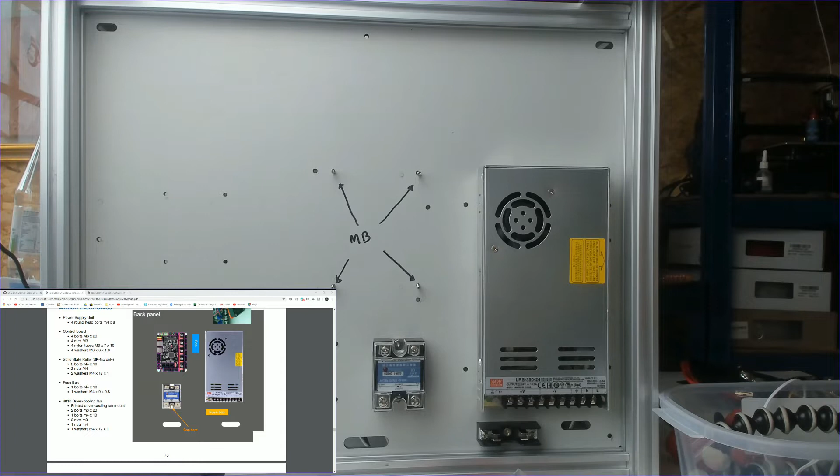So with the bolts in place, I'm going to put the nylon M3x7x10 tubes over the bolts, like so. Then the motherboard will sit on like that, and then we'll put a washer and a nut on each one of those 4 bolt heads and we'll tighten up.

So next is the driver cooling fan, which is that little item there, and for this we will need 2 bolts M3x20, 1 bolt M4x10, 2 M3 nuts, 1 M4 nut and 1 M4x12x1 washer. Now it would appear that using the fan as they suggest, you are only actually putting 2 nuts and bolts in. Now there's room for 4. I think we've got enough stuff to put 4 in. I'm going to put 4 in.

The other issue is they're asking us to use the 3x20 bolts. Now those bolts do leave you quite a bit of spare thread afterwards. You might want to cut them down afterwards. You might want to go for something slightly shorter if you happen to have maybe some M3x15s, something like that. That would suit it better.

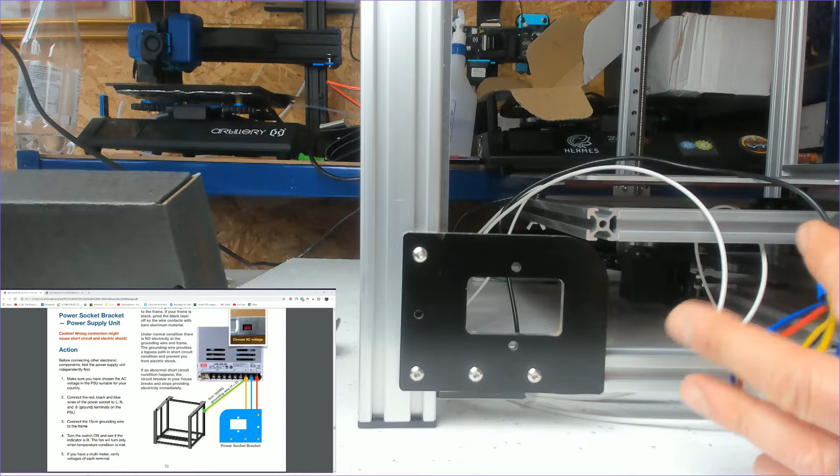Your fuse is in there, it should already be in. Rotation wise, I would have it in personally that way, although we will check that the wiring fits, but I would have it that way so the switch is near the front, so if you're reaching up the side to switch the switch off in an emergency, you're not having to come past the power socket to get to it. So I would have it in that orientation, feed the wires through like that, that sits neatly into there, those wires go through the back there.

Now it also doesn't state which fixings you need. I will check in the kit. I would imagine possibly the M4x8s may work. I'll just offer one of those up and see how it looks. It appears to be a little tight, but we'll wind it in and see how much thread we have on the rear for a nut. Just enough to get a nut on the back of there, so that's what I'm going to go with.

An M4x8 top and bottom. Apart from anything else, aesthetic wise it matches in with these, so it looks quite nice. So we'll put the nut on the back, just loosen that off a touch and then tighten it back up so it grips my nut. Like so. We'll do the same at the bottom and then we'll turn around and sort the wiring out.

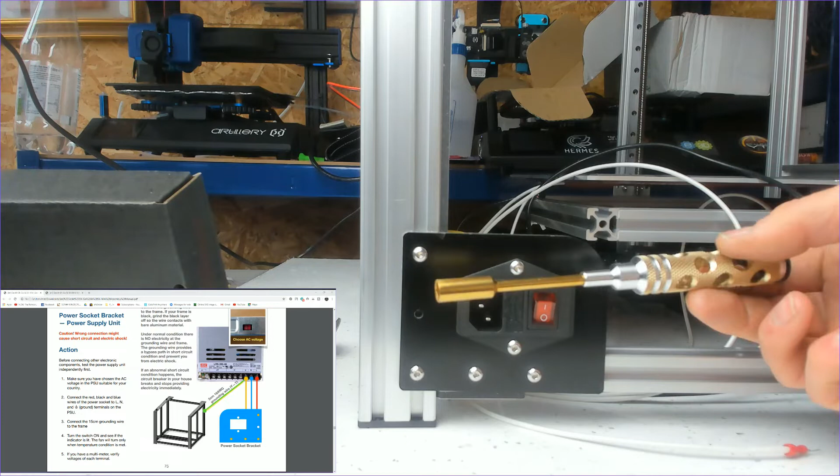Just a little addendum for you at this point. This bottom bolt is a very small amount of space at the back here to get your fingers in to get the nut on. So what I'm going to use is I have this little set of aluminium, there's sockets, Phillips head screwdrivers, flatheads and small Allen fittings which I got from Banggood. And I'll sit the nut into that and then I can bring that in from the back like so, just get it into where I need it, which it just fits in, and I mean just and only just, and then tighten it home like that.

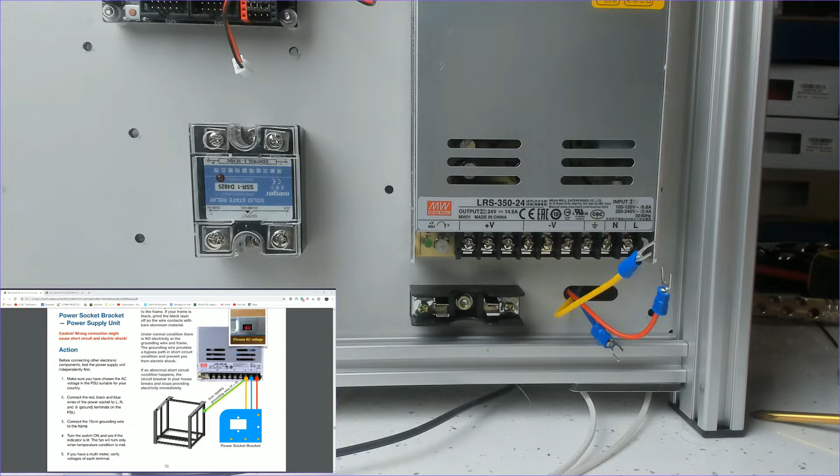So now to fix the wiring from the switch into the back of the power supply. The red goes to the first terminal. So unscrew the terminal, get to the flat back part of your terminal and make sure you get it behind the square washer that's on the terminal screw as well. Screw that back nice and tight.

The middle one, as per the instructions, is the blue. So again, make sure that this flat part that you can't see from my fingers, the flat part of the spade connector goes to the back. Unscrew the terminal, put it behind the square washer so it sits up like that. Make sure it's all the way home. Tighten it back, and then that leaves the yellow one, which is the earth.

Now with this we also have this short piece of green wire with double terminals on it. This is to earth to the chassis. Now it says screw it to the chassis. I intend on using a T-nut and a couple of washers to actually put it into the frame here. So the best way of doing this is to put these two back to back like that, and then we'll slide those two in.

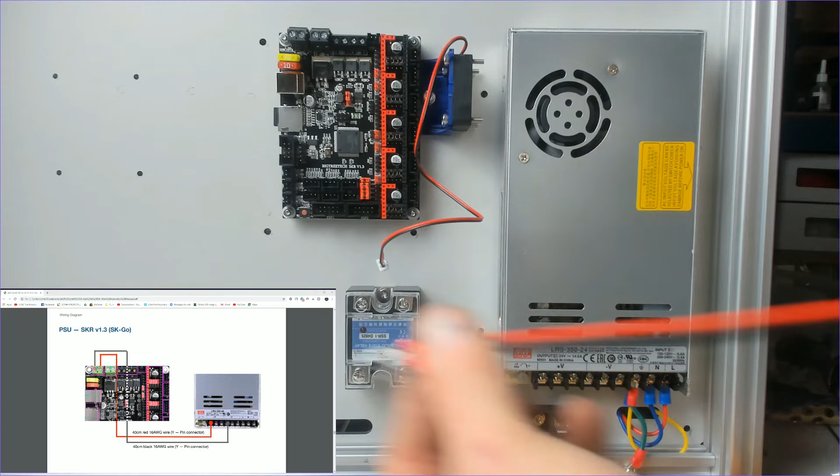So the first thing we're going to do is get power to the motherboard. Find your 40 centimeter cables, just grab a tape measure, measure them, they're very accurate. We're going to run these cables up the back of the motherboard, like so. And we're going into this terminal block here. We've got negative on the outside and positive on the inside, so negative on the left, positive on the right. Put it into the terminal block, screw it tightly up.

Unscrew the positive, push it into the terminal block, make sure you seat it all the way in, tighten it up. Don't put too much pressure on this plastic block. If you want to nip it up, put your finger against there to stop the actual block from twisting. Bring your cables down, like I say, behind the board, and these are going to go in to the positive and negative, this one here and this one here.

So the positive lead, loosen off the terminal. As before, make sure that the flat back of your connector goes to the back. Make sure the square washer is in front as well. Tighten that back like that, and bring your negative cable, bring it around behind that positive like that, and that's going to the first negative terminal, which is that one there. So we loosen that one off.

So we grab that cable, that goes in to there like that. That's the Z stepper, and then we feed that through under the bed. And although you can't see it, trust me, I am plugging it into the Z stepper motor, first lifting the bed so I can actually get to it. Like so. And then I can plug that cable into the stepper motor.

Now at this point we have the stepper motors wired in. You must no longer move these stepper motors at any speed, any of these stepper motors at all, because they will backfeed to the board. Because they are stepper motors, they can produce electricity, a bit like a dynamo on your bicycle. So if you spin this stepper motor too quickly, it will create voltage which will feed back into the board and could blow the board. So now you've done that, no fast movement on these stepper motors in any way, shape or form. If you need to do it, unplug them first, move the stepper motor if you need to reposition the head, or do it exceedingly slowly. Do not do any quick movements from now on, now that they're plugged in. Backfeed the board, blow the board, no fun.

Now it would appear that they've changed the colour of the cable for the Z minimum endstop. If you look at the picture here, it's red, black, green. The cable I have is red, black, white, but they're actually in reverse anyway. They're white, black, red. It doesn't matter as long as both ends of the plug are the same orientation, so they're both white on the left, black in the middle and red on the right. At the end of the day, it's only colours. As long as they are the same on both, it'll be perfectly alright.

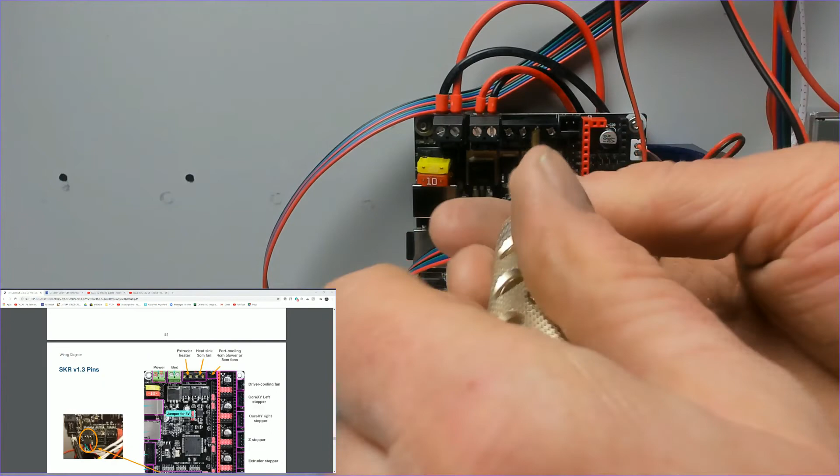So the bed leveling sensor goes into there. The heatsink fan is this one, positive to the left, negative to the right. Make sure you get all the bare wire inside the clip. Always better if you don't have your hands in the way of what you're doing. In we go.

Next, we have this one, which was the extension of the part cooling fan, and the part cooling fan, according to our data sheet, is this one here. So that goes in like so. Then we have our hot end, which is these two here. Doesn't matter which way around these go on. It goes into this connection here.

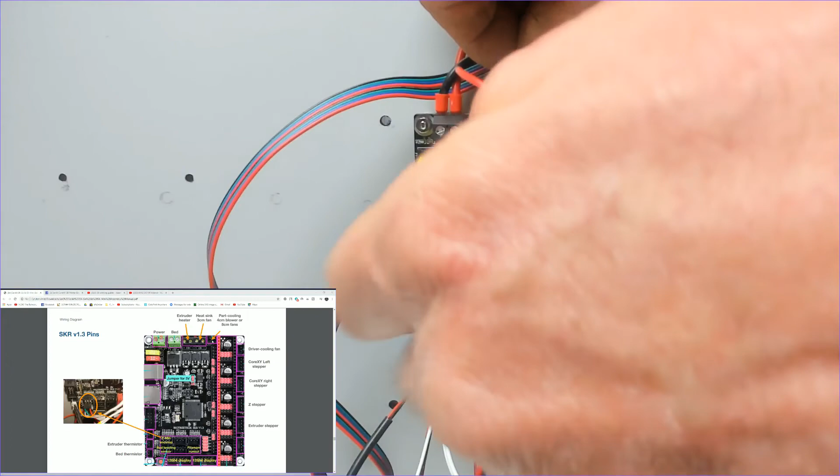I'm just twisting the wires so we get them in neatly. Grab my screwdriver. Loosen off the terminals. Doesn't feel to be going far enough in, just lift the terminal back a little more until it seats. Tighten that one up. Same for this one, straight in. Tighten that one home.

Now, as you can see, the thermistor cables came without a plug. Fortunately, in the kit there is a plug that will go into those two connectors. Doesn't clip into place, but it is the right distance apart for the pins, so you can either fit a proper plug or you can use this. I'm going to use this. They even supplied two short lengths of heat shrink material. So I'm going to bare these wires back slightly, twist them together, solder them, and then apply the heat shrink, and then we can slot that into place.

So we now have those two soldered on and heat shrunk into place. It does not matter about the polarity on the thermistor, so you can just push that onto there like that, and that's in place. Now we're going to just tidy the wires out of the way, and we're going to install the stepper drivers down through here.

Just a quick note, before installing the drivers, make sure you have removed all the jumpers from the pins underneath the drivers, as they are not needed for the 2209s. You can leave the bottom ones on, as we're not using that driver anyway. Please note, after removing the jumpers off these pins here, you need to place them where it shows there and there, there and there, and there and there.

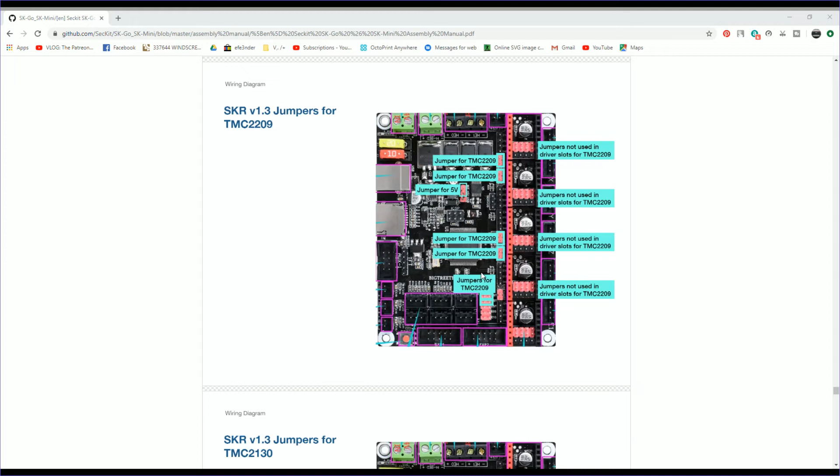How do I know you can get these pins in the wrong place? Don't ask. Let's move on quickly.

Then simply mount your heatsink onto your driver. Make sure you've got it the right way around. It actually says top, and if you look at the side, we've got red on there which matches up with the red on the left hand side, and black on there which matches up with the black on the right hand side. And just push your driver in, make sure it sits flat, and we'll just repeat the process for 2, 3 and 4, and that's your drivers in place.

So now we need to grab the firmware and put it onto the SD card that came with the board. So we'll plug that into the computer. So now we're going to the GitHub.

As you can see, there's the assembly manual, firmware binaries, the frame spec, everything else is there. So we just need to click on the firmware binaries, and it says here put a corresponding binary onto a TFT SD card, which we've put into the machine already. Download it to that card, rename it to read as firmware.bin, put the TFT card into the slot on the SKR 1.3, reboot, and it will flash. So that seems fairly simple.

So we're going to the 2209s, and it pulls up lots of different versions. Now make sure you pick the right version. You can see that we've got one there that says a Z of 300, the SKR 1.3 board, the TMC 2209s, and the direct BMG extruder. That's what I'm running, so that's what we'll download. So just click on download.

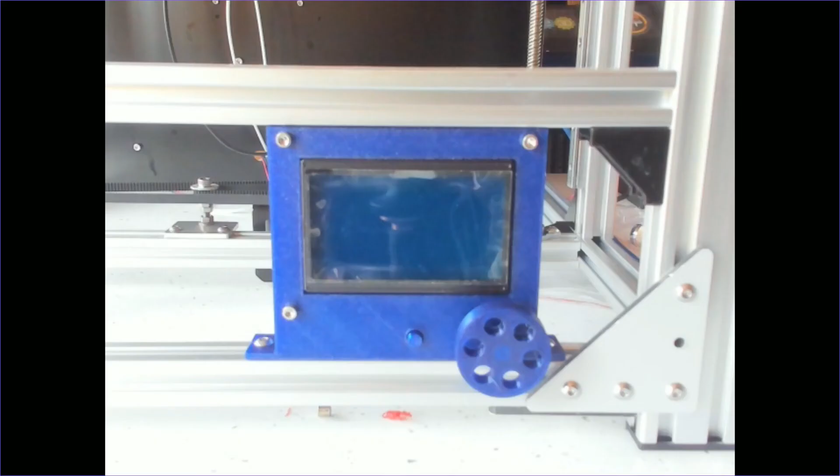Now if everything has gone correctly, we should be able to switch on the machine at the back and see it flash the firmware and start up for the first time. So fingers crossed everybody, no blue smoke please. I go to the switch, switch it on. There we go, Marlin firmware 2.0.3. We're in business.

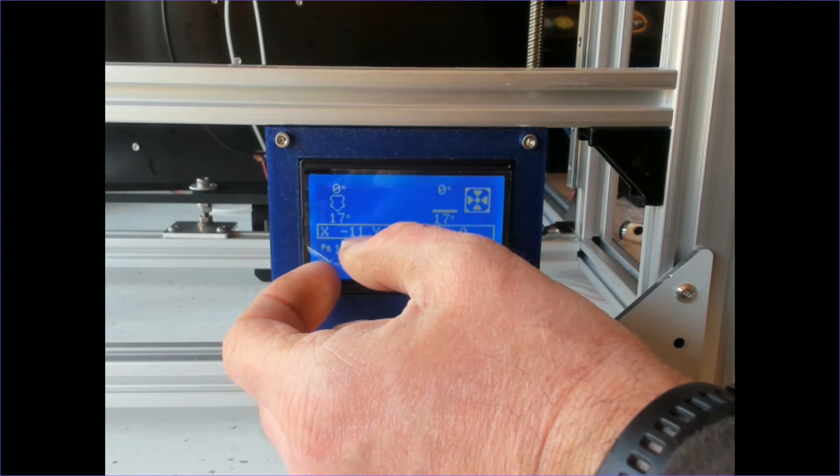So the final thing to do at this stage is that. And that's it, congratulations. If you haven't got the blue smoke and you've got your screen up like you just saw in the video there, you've built your machine. Now at this point we're going to end this video, we're not going to go any further. I would expect you now to start doing some tests, make sure that the movement of your stepper motors is smooth and they move in the correct way.

If you do have any issues with any of these, check the Facebook group, check the GitHub, get on the Discord channel. There's lots of people out there that can help you solve these little problems. Try a print, try getting your bed leveling sorted out. Again, there are a lot of people out there that can help you. I'm going to steer away from the sensored bed leveling, as I don't think, for me, it's the way forward. I don't think it's going to be particularly accurate from what I do. I'm going to manually bed level it and then set up a mesh and then work from there.

But I am very soon going to put an ABL kit on it. I'm going to take the board back out again and put in a Duet Wi-Fi board, a copy of course, because no way I can afford a Duet Wi-Fi board. But these are the things we'll do as we go on. Now you have the machine basically built, it's time for you to just explore, see what you can do. There are plenty of people, like I said, the Facebook group is full of people with profiles for Simplify3D. There's a couple on there for the Prusa slicer. Just now start to look at the machine for yourself, see how you can improve it.